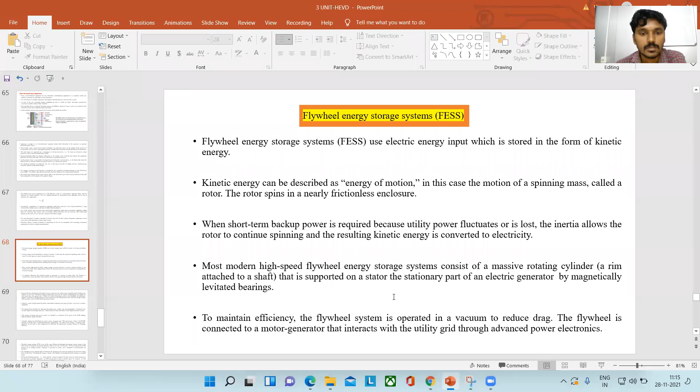Flywheel energy storage systems (FESS) use electric energy as an input, which is stored in the form of kinetic energy. This is the energy storage device. Generally, in other devices like supercapacitors and hybrid energy storage systems, we are storing electrical energy, but this concept is somewhat different. Flywheel energy storage systems store the energy in the form of kinetic energy. But here the input is electrical energy.

So kinetic energy can be described as the energy of motion. In this case, the motion of a spinning mass called a rotor. The rotor spins in a nearly frictionless enclosure. So how is this kinetic energy converted? We are taking one rotor, a device which is spinning, which is rotating. That device can be called a rotor. So here we are using the spinning of mass, means we are using the spinning device, the rotating device.

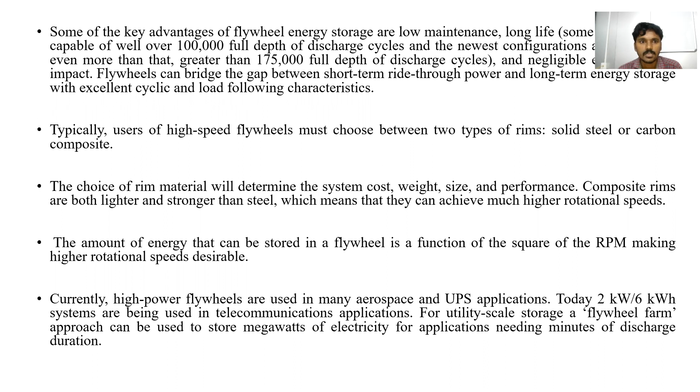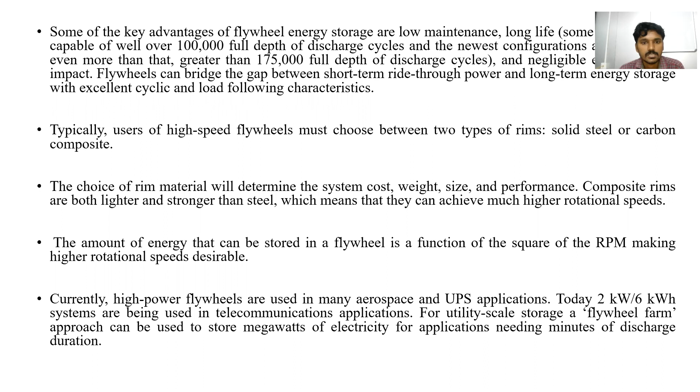EF is equal to 1 by 2 JF into omega F square. Here, EF is nothing but flywheel energy stored, meaning the energy stored in the flywheel device.

Next, J is nothing but moment of inertia. Since it has a rotating part, the moment of inertia is present, so that is also to be considered. So flywheel moment of inertia, and omega F square.

Omega F is nothing but the speed of the flywheel energy storage system, or flywheel energy storage device, that is in radians per second.

So whatever energy is stored in this flywheel energy storage device, that energy is directly proportional to the square of the speed of the flywheel energy storage device. Square of the speed.

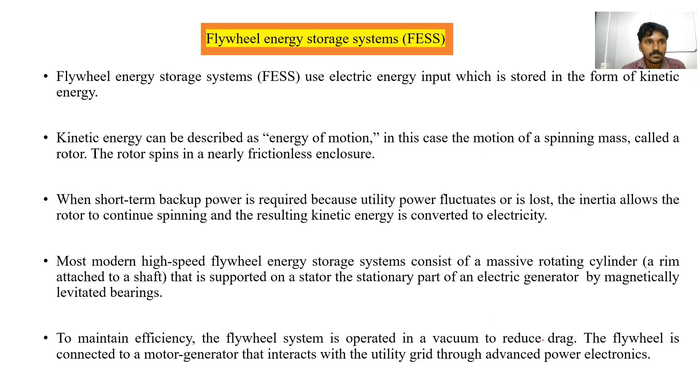So we already told that it has some important components. What are the components required, what does it consist of? A rotor, that is a spinning or rotating device, and a motor generator, or simply a machine. Also we need electrical energy as an input for starting the machine.

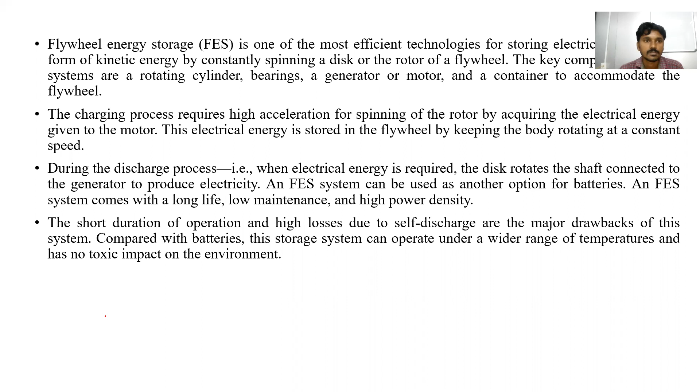For starting the motor, we are also using one vacuum chamber, or vacuum pump.

So what is the operation of this circuit? Whenever we are giving electrical energy as input for this motor, it will start in motoring mode, and it will convert electrical energy into mechanical energy.

It will rotate this rotating part of the device, the spinning device or rotor. This motor rotates this rotor, and this converts mechanical energy. Meaning we are converting electrical energy to mechanical energy, and this mechanical energy is to be stored.

But how this mechanical energy is stored, I will explain to you later after 1 or 2 days. I will repeat this topic again. Is it okay?

Is it okay, all of you? Hello, anyone sir? I have one question here, I have some doubt.

The rotor is rotating and converts mechanical energy, and the energy is stored in the form of kinetic energy. We always have to remember the energy stored in this device. But how is this kinetic energy stored? That is my little doubt and question here.

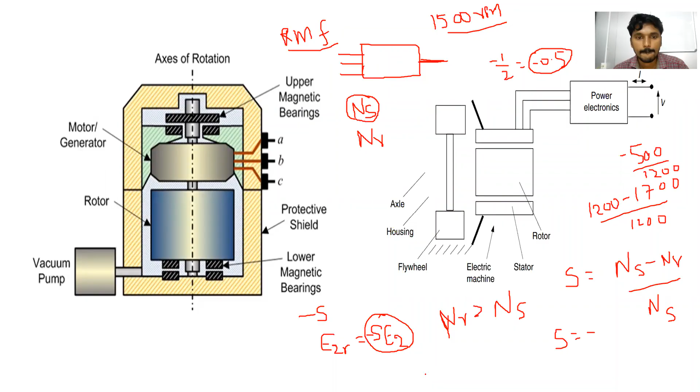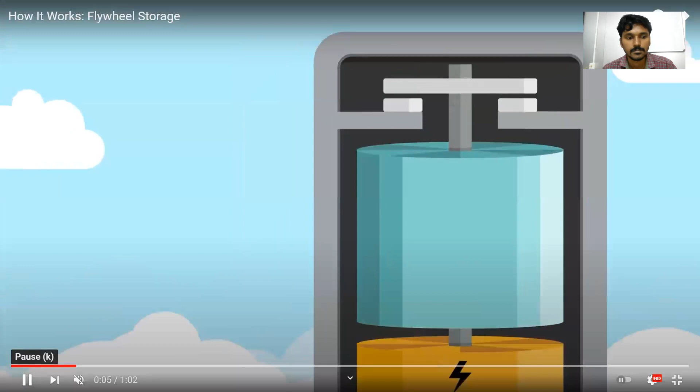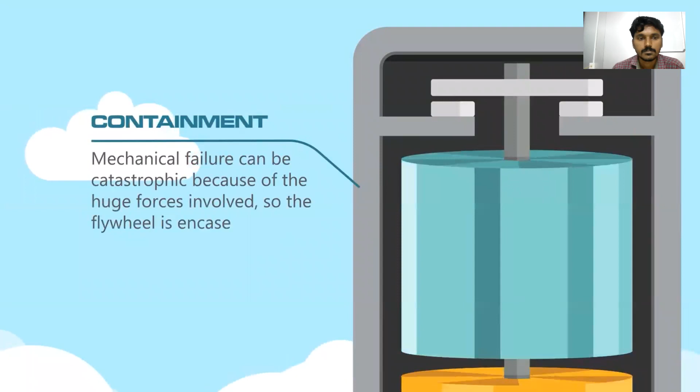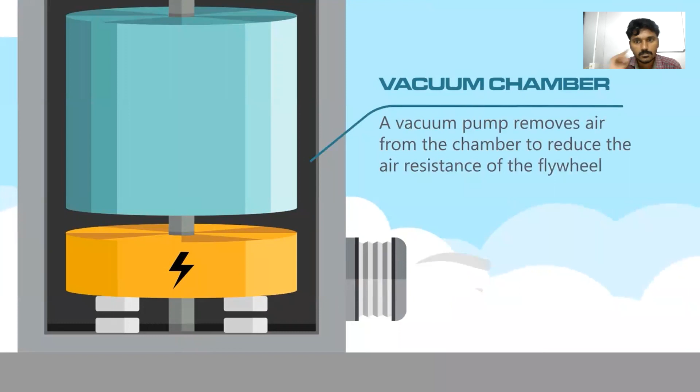So just wait, I will show you a small video of this one. This is just a small one minute animation of this device. Again, I will repeat you.

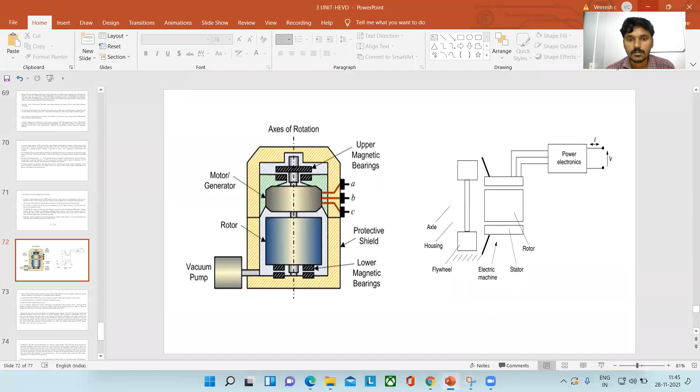Okay, I think you got the small one minute animation. Clear? So here, why we are using the vacuum pump device?

This vacuum pump is used to remove the air which is having the resistance, in order to increase the efficiency of the device. Whatever is having the air resistance, due to this resistance, the losses are going to increase. If the losses are increased, the efficiency of the device is going to decrease. That's why, in order to increase the efficiency of the device, whatever air is having the resistance, that resistance also should be removed or decreased. For that purpose, we are using the vacuum pump in this device.

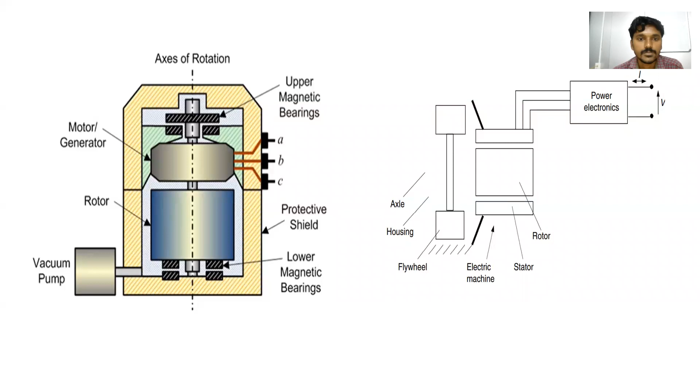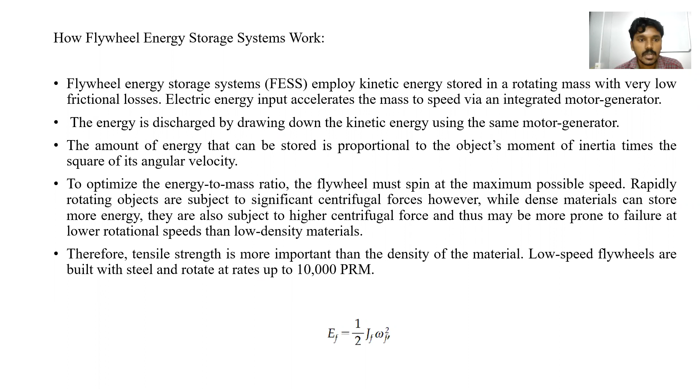Clear? So this is the simple information regarding the flywheel energy storage systems. And one more thing: in flywheel energy storage systems, the rotating part will rotate at very high speeds. That is one of the main advantages of this device.

And we are having more advantages than the other devices. So additionally, they are having several advantages over the chemical energy storage devices like battery. They have high energy density and substantial durability, which allows them to be cycled frequently with no impact to performance. It is having high energy density compared with chemical energy storage devices, and also it has no limitations on the charging and discharging cycles. This is one more advantage of these flywheel energy storage systems.

They also have very fast response and ramp rates. In fact, they can go from full discharge to full charge. For example, in the case of chemical batteries, when it is fully discharged, there is a chance to decrease the lifetime of the battery. When it is fully charged, there is also a chance to increase the heat of the battery, overcharging it, and there is a chance to damage the battery. But this is not possible in the flywheel energy storage systems.

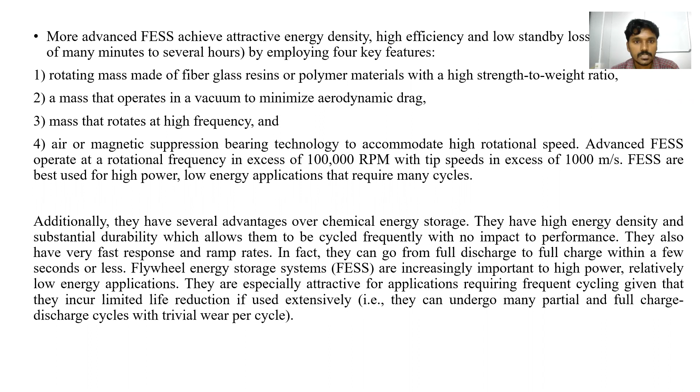So what are the key technologies of the flywheel energy storage systems? Flywheel energy storage is now at the experimental stage, and there are still five main technical problems.

The flywheel rotor is the most important part of the flywheel energy storage system. The transformation of energy, the whole system, depends on the rotation of the flywheel. It is necessary to develop the flywheel with high strength and a suitable structure based on rotor dynamics design. So it has some drawbacks, and it also has some technical problems. For example, because it has a rotating part, and that rotating part is rotating at high speed, this is one of the main key components in order to transform energy from electrical to mechanical or mechanical to electrical.

Is it clear? So whenever this rotating part is damaged - and there is a chance to damage it because it is rotating at high speed - if this rotating part is damaged, there is a chance to damage the whole system. The whole system is going to be shut down. There is no energy transfer from mechanical to electrical or electrical to mechanical.

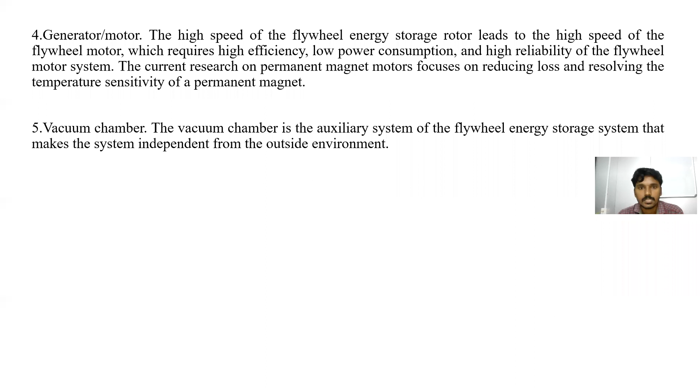But this vacuum chamber is an auxiliary system. In case this vacuum chamber fails, the efficiency of the flywheel energy storage system is going to be decreased. This is also one of the main drawbacks.

It is having some technical issues and problems. The flywheel has a rotating part, a motor generator set, a vacuum chamber, and bearings. So if any mechanical part is damaged, there is a chance of getting zero output.

So these are the simple information regarding the flywheel energy storage systems.